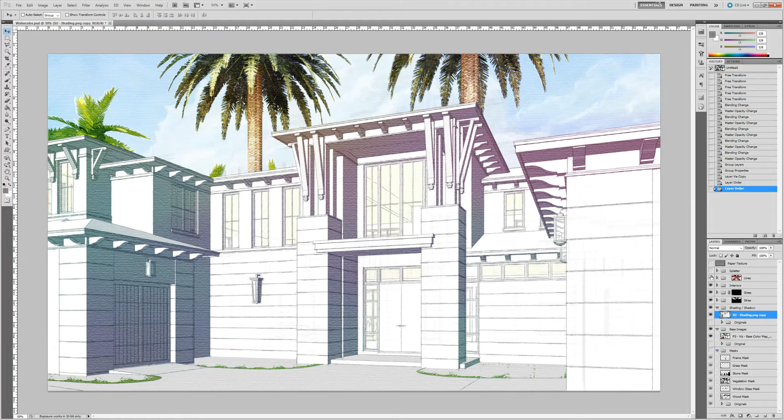So now we're dealing with the shading. I'm actually going to turn off everything else just so I can focus on my shading. And what I want to do is actually get rid of the white. I just really want to deal with the colors, this shading.

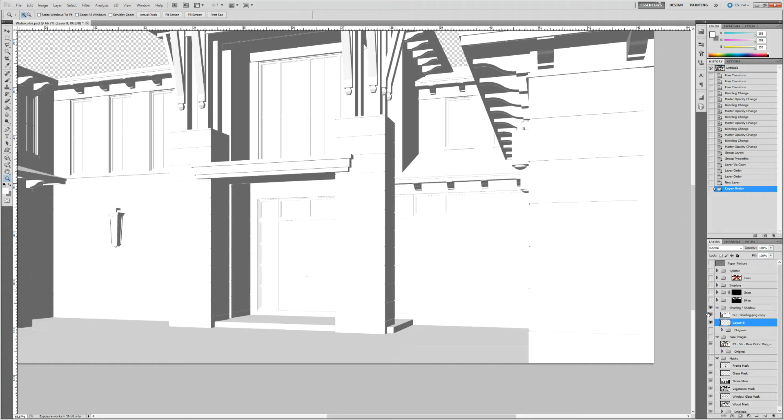And so the best way of doing that is I'm going to make a second layer, put it underneath so I can keep the name. You'll see in a second. And if I double click the layer, it gives me these blending options. And if I just drop this white down just a little bit, you can see it starts taking away the white. The more you go, it'll get into the grays, and then the lighter grays, then darker grays.

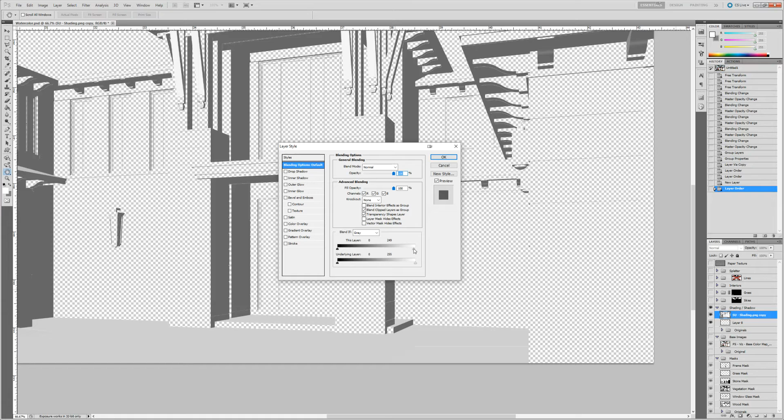And it gets rid of everything, so it's really how far you want to take it. Really sticking to right around 250 tends to get rid of just the whites I want to get rid of. Though theoretically the white's not gone, it's just blended away.

So that's why I'm creating this second layer. And if I group these two layers, the second layer that has nothing on it, and merge layers, it actually now physically gets rid of the white. And again, that's partly why I keep the original, just so I always have a base version in case I want to do something with it.

And so what I want to do on my shade and shadow is I want to go back here and I want to do the whole group under multiply, because I want to be able to multiply this layer. So I'm going to come down here, even though it's not doing anything yet because it has nothing to multiply to, that's fine, it's just going to be set.

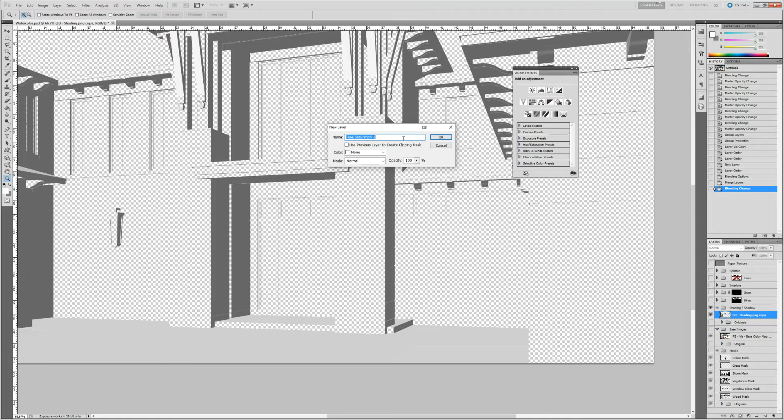And then similar to what we did with the interior lighting, I want to add an adjustment layer, and we're going to do a hue saturation again, and we're going to call this shade coloring. And again, I'm going to press Alt and link it to just my shading. We're going to colorize this, and now you can see I can colorize this whole thing in. What's nice by doing this adjustment layer is I can continually come back and adjust the color. I'm not setting it, and I'm not damaging the layer underneath.

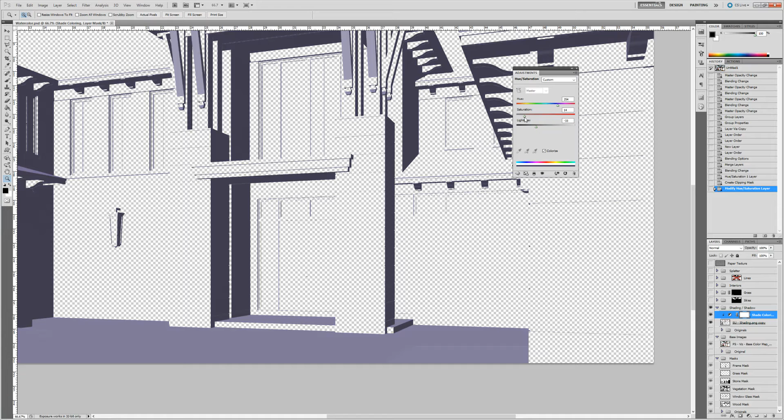But I'm going to come in here and find like these nice purples, make it go a little darker, though it takes some of the saturation out. The purples always seem to work really well for shade and shadow. So I think that'll work. We can test it out. If I don't like it, I can come back here and adjust it again.

So let's turn our base image on, and we can really start getting a feel. And you can see this purple giving this shade is really nice now. Even though it's pretty heavy, and we're going to get into that in a second, you can see how we can really control the shade and the shadow by the way we exported these out in different layers.

So two things to note. Number one, you can see that since we did this without landscaping, I have an issue of shading going across my tree here. And two, it's definitely way too dark.

Both are pretty easily corrected because I'm going to select my shadow or my shade layer, and using my vegetation mask, I'm going to click on my vegetation, and I'm going to come in here and create a mask over it. Again, it's backwards, so just Control I to switch it, and you can see that that now masks out my shading around my vegetation, which is exactly what I want.

And then the second thing is how dark it is. I'm going to use my opacity, and we can really adjust and get to a level, if we want it dark, give it a dramatic shade effect, or just enough to really make some things pop. Really, it's up to you, it's up to the image, it's really what's going on.

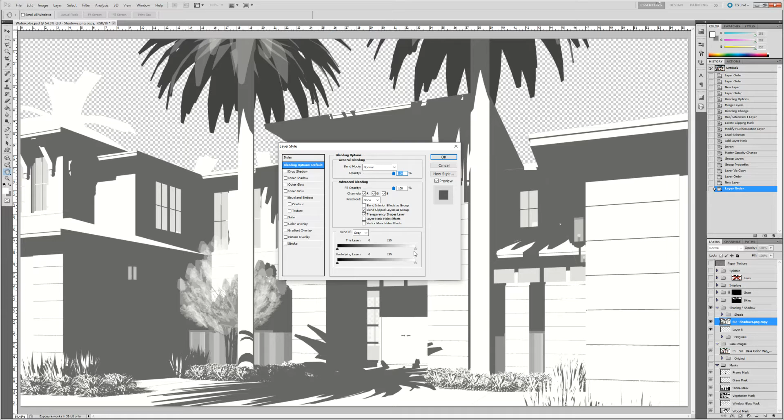So we can go ahead and start adjusting this. Again, we're going to do the same thing. I want to get rid of the white, and you'll see what I'm saying. I'm going to turn off my base file so I'm dealing with just my shadow layer. We're going to knock this down to about 250, which gets rid of all the white. So now it's really just an export of the variation of shading, or of shadowing levels.

And I'm going to merge this with a blank layer, which now gives us just the shade cropped out from what we're looking for.

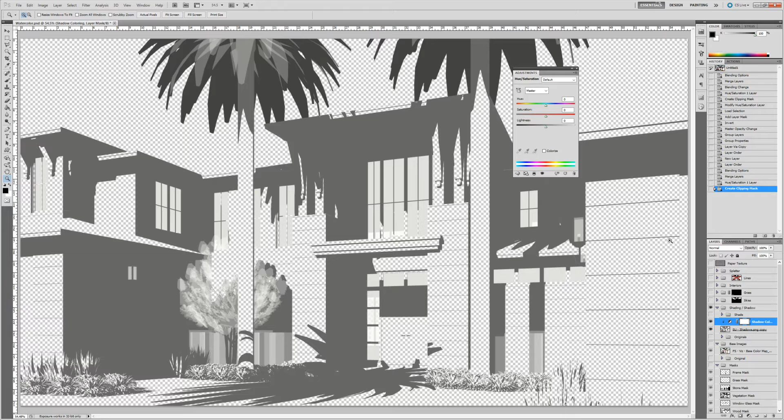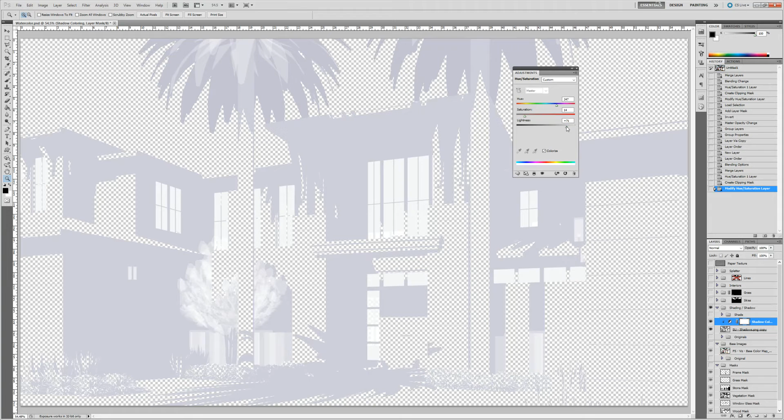So again, I'm going to add an adjustment layer of hue and saturation, and we will call this shadow coloring. Using the Alt key, I'm going to link it to just that one. We're going to colorize and find a nice purple, maybe go a little darker, but take some of the saturation out. Even though we adjusted things with opacity on the shade, you can always adjust it here and make these just ever so light shadows that we're dealing with.

So there's really multiple ways of adjusting this, and that's such the great part about this process, as well as we can always come back in here and continually adjust it as we need to.

I'm going to group this together and call it shadows. So now you can see that if we add our base image, we really have some nice shadows going on. Again, it's a little dark, so we can always play with the opacity. Maybe let's stick with 40. It seems to be working well. That's giving a lot of character to this thing, a lot of depth.

So the other thing I want to play with and show you is, I'm actually going to move this. See if I can do this. I think I can move my adjustment layer and link it to the group. No, I can't. That's okay.

So anyway, what I'm going to do is make a copy of this, and I'm going to turn my base layer off. So again, I have two copies of my edited shadow layer, and what I want to do is, since this is straight out of SketchUp, SketchUp shadows will be these very hard edge shadows, which is fine.

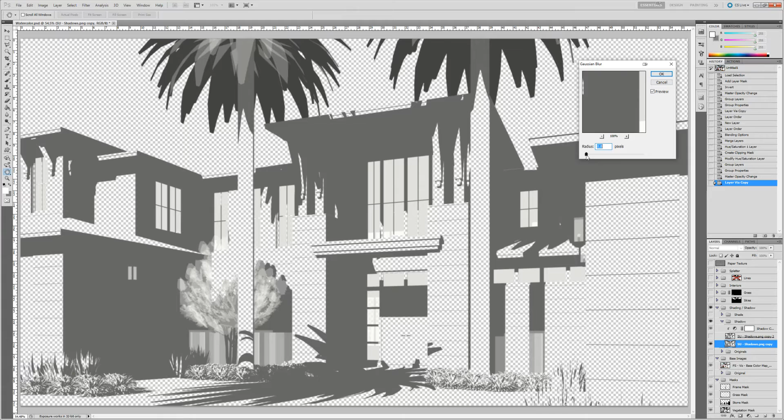Again, that could be an effect you're looking for, but what I want to do is come in here and do blur, Gaussian blur, and you can see I can really play with getting something a little bit more scattered in lighting effects. I can really drop this down, make it hard lined, or bump it way up and go way overboard. Or I can find that place that just takes the hardness out of the shadow and gives just a little bit of softness. Maybe something right about there.

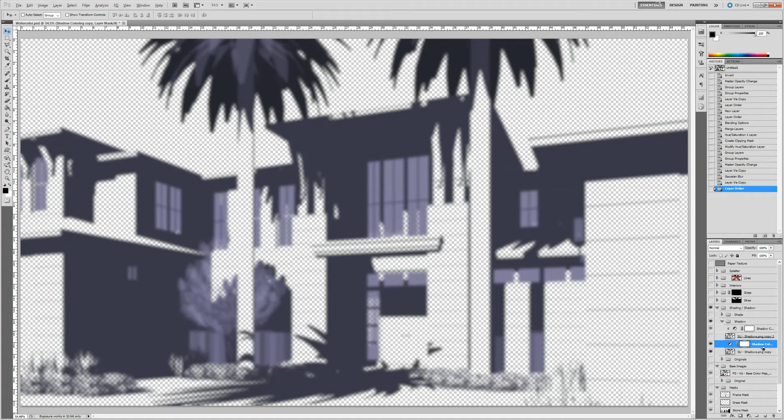I'm going to copy this adjustment layer and bring it here, and I'm going to link it. So I'll group this — this one is my original, hard shadows — and I'll link this one and call it my soft shadows.

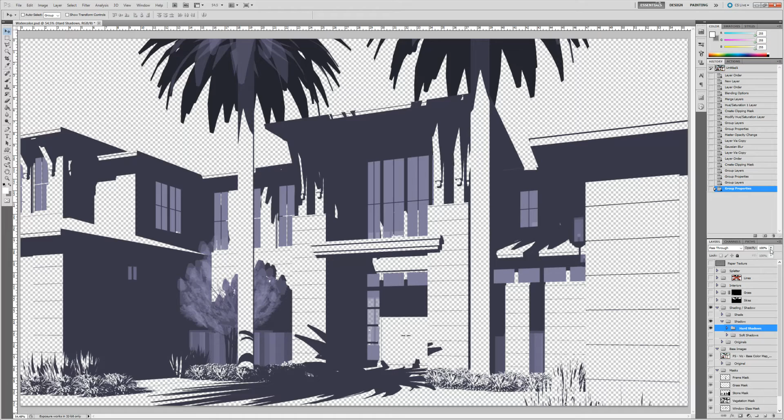I just want to use my soft shadows for right now. Although, let me check — yeah, my hard shadows are on. I'm going to set the opacity for the group at like 40%, and then turn it off. Same thing here with my soft shadows, let's bring this down to 40%. And if I turn my base layer back on, here we go.

Now we have some soft shadows that are really kicking in. You can see the difference between hard shadows and really where it doesn't play very well is these trees — you can see the hard lines of these trees, which is fine, but it's not great. So now if we do the soft shadows, it feels so much more realistic.

I usually leave landscaping on when I do shadow exports, so I can get these nice landscape shadows on my building. But you can see I tend to get these halo effects around the leaves.

So you can always come in here and add a mask if I wanted to, and with my brush come in here and edit this out, get rid of the shadows underneath my tree. I don't need the tree to be that dark.

This could even be done for other areas. Maybe it's too dark under here. We don't want it that dark, or maybe you do. It's just what's great is having options. You can really control things doing it this way.

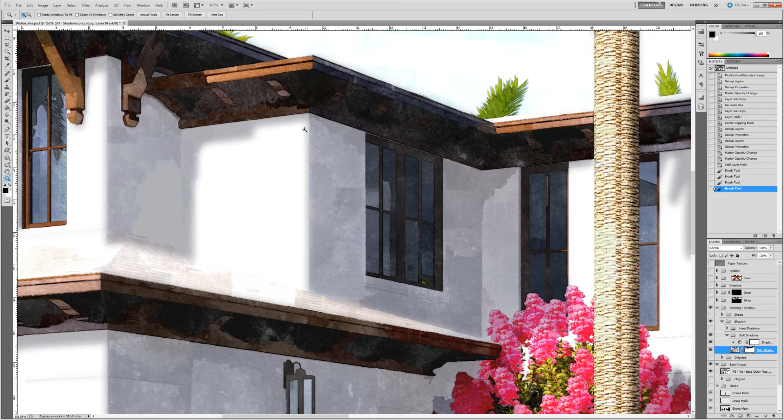What's really cool too is even having blurred my shadows, it gives the corners some nice roundness versus being such hard edges, because that doesn't really exist in the world. Between the soft shadows and the shade, it gives enough definition with the shading, but the shadows really give a little bit of softness to it. So I think the two play very well together.

So you can see that adding in my shadows and my shading really starts giving a lot of depth to this, especially here at the corners, where it's giving that line work a little bit more love, so it doesn't feel so white.

Again, turning my shadow lines off, you can see it's just getting a little bit washed out, so this is really giving a lot of depth to it.

So you can see if I start adding all my layers back on, my line work might be too heavy, so we can come back in here and adjust the opacity of this. Maybe let's drop it down just a little bit more. Maybe that's feeling a little bit better.

So we're getting pretty complete here. Really the next step is going to be coming in and adjusting maybe the actual base image itself. I think one of the things we're really going to want to do is make this stone pop a little more. It's not quite popping the way I want it to, it's getting really washed out, especially if we look at our original image.

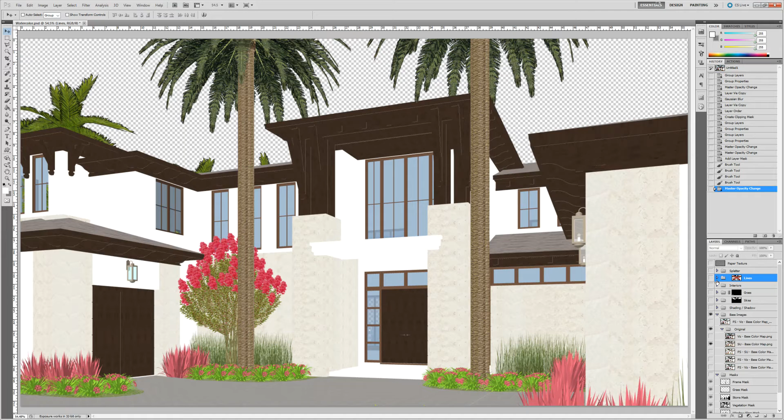We'll play with the windows a little bit more, even maybe the wood a little bit more. So we're really going to start having a lot more fun, and we can see by adding in some of these other layers or other backgrounds, what kind of effect we can get. Just putting that one on, we can see what it looks like underneath this.

Yeah, so here's a more watercolory version, or here's a watercolory with some sketchy effects. This is straight out of SketchUp, our color map. This one's straight out of SketchUp as well.

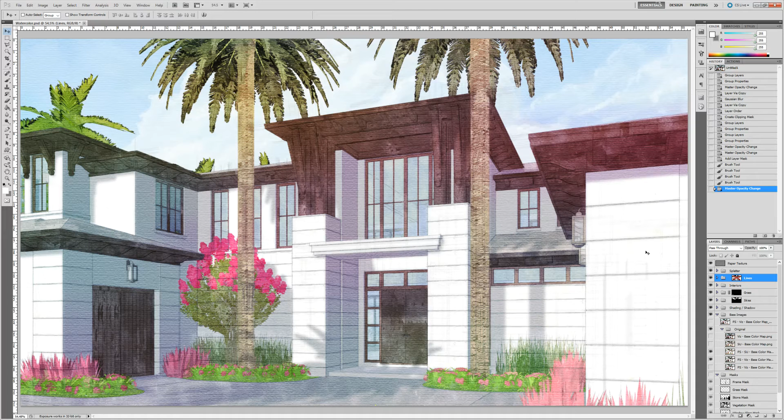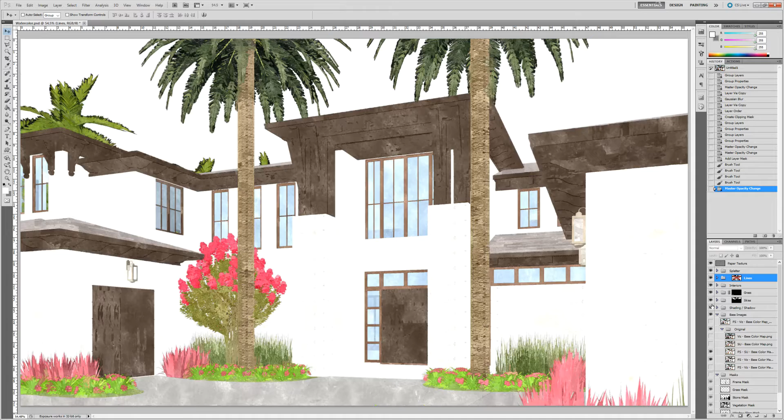So again, you can see that there's many levels as to what you can do. This is the SketchUp base color map with the watercolor filter run in FotoSketcher, so you can see that's even looking nice. And really, this is where the shade and shadow really comes into effect, applying it on top of the SketchUp exported versions, because we exported the SketchUp with no shade, no shadow whatsoever.

It's extremely flat until we come in and really mess with the shade and the shadow, and what a difference that is. Again, this is without a rendering, straight from SketchUp, so we can get a lot of effects and make it look really nice. Especially these shadows that have a nice blurred edge to them. You don't get that in SketchUp, SketchUp will only give you hard line edges.

And the last one I think we have is that's the one what we're using, that's just my original version of it. So you can see there's all kinds of ways that we can take this, and just by turning layers on and off, we can really change the effect of what we're doing.

Again, going back to our splatter, that just instantly gives it a warmer feel versus a cooler feel versus somewhere in between. And this one is very fun as well, so many different colors going on, it just gives such a great effect to it.

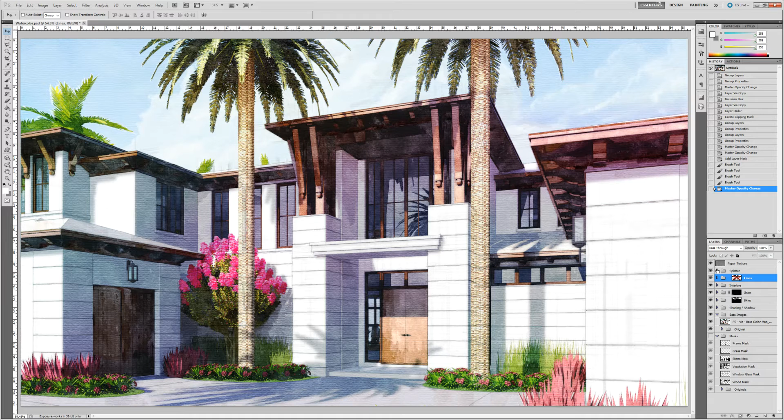So anyway, we'll get into some of our final editing in the next video, and start exporting out some final images.